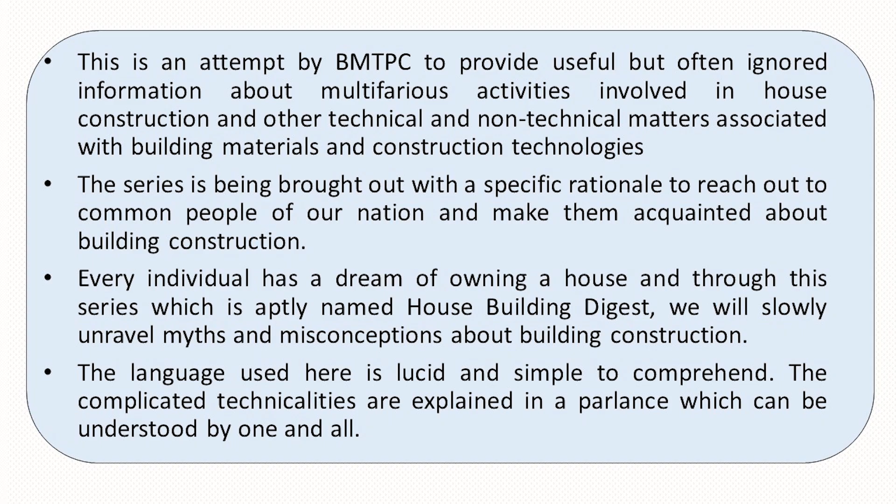Through this digest series, BMTPC is reaching out to the common man to provide useful information about various essential activities involved in house construction, including technical and non-technical matters associated with building materials and construction technologies. Every individual has a dream of owning a house, and through this series, we will slowly unravel myths and misconceptions about building construction. The language used here is simple so that it is understood by one and all.

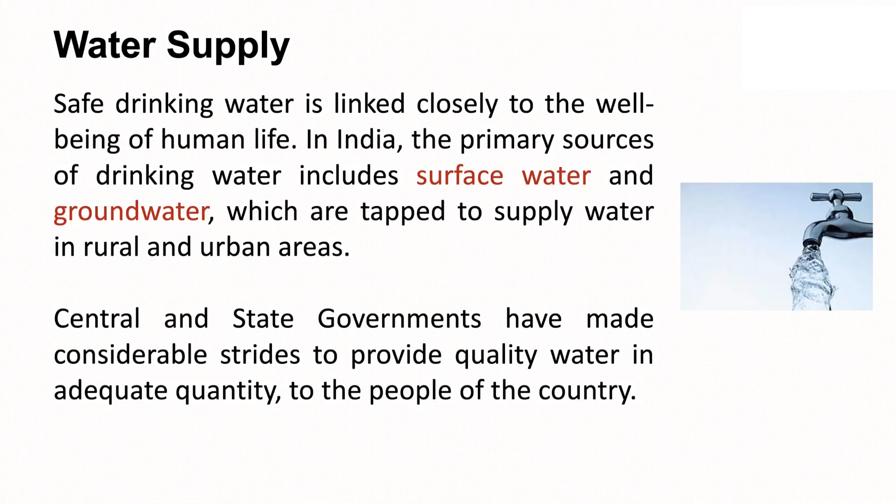Safe drinking water is linked closely to the well-being of human life. In India, primary sources of drinking water include surface water and groundwater, which are tapped to supply water in rural areas and urban areas. Mainly, central and state governments provide quality water in adequate quantity to the people of the country. The quality of water being supplied for domestic purposes is also a cause of great concern.

Water gets contaminated sometimes by different physical impurities, agriculture and industrial waste, and underground chemicals and minerals. This sometimes leads to waterborne diseases, especially among the lower income groups of the society. Regular testing of water quality and using an appropriate water purification system is therefore essential for supplying quality water.

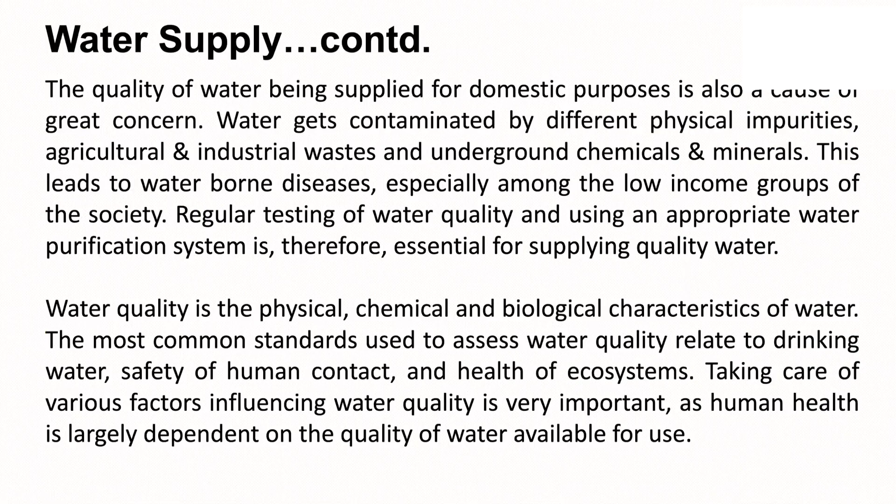Water quality is the physical, chemical, and biological characteristics of water. The most common standards used to assess water quality relate to drinking water, safety of human contact, and health of ecosystems. Taking care of various factors influencing water quality is very important, as human health is largely dependent on the quality of water available for use.

Let's discuss first water supply in urban areas. In urban areas, the municipal corporation or municipalities and urban local bodies are responsible for providing public water supply system. It includes collection of water from source of supply, giving necessary treatment to water for making it hygienically safe and potable, and finally distributing water through a network of piping works, which includes trunk mains, street mains, etc.

Water from a street main is supplied to the individual buildings through service connections. Within the building, the water is distributed to different fixtures through pipes which run through the surface or are concealed in walls or below the flooring.

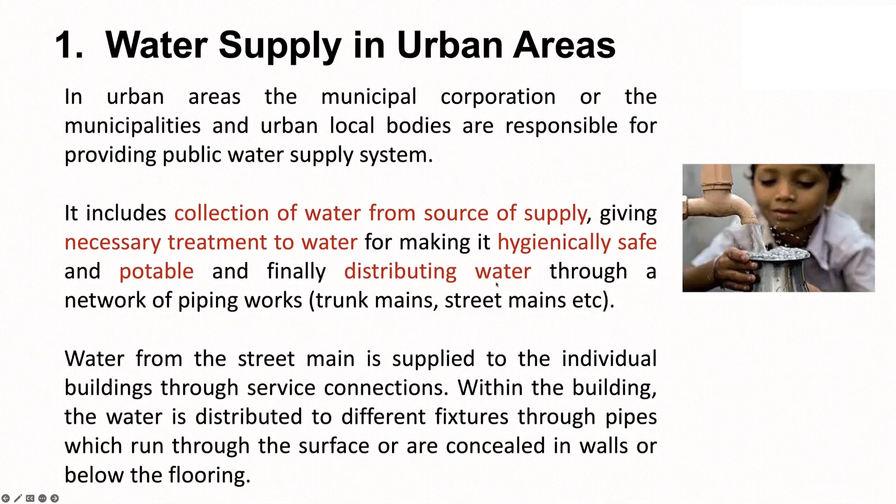Water for domestic purposes is required for drinking, bathing, washing of clothes, cleaning of house and utensils, flushing of toilets, etc. However, the water requirement varies from place to place depending upon the geoclimatic conditions, living habits, etc. In any case, some standards have to be resorted to so as to have adequate quantity of water for the household to carry out their daily domestic chores.

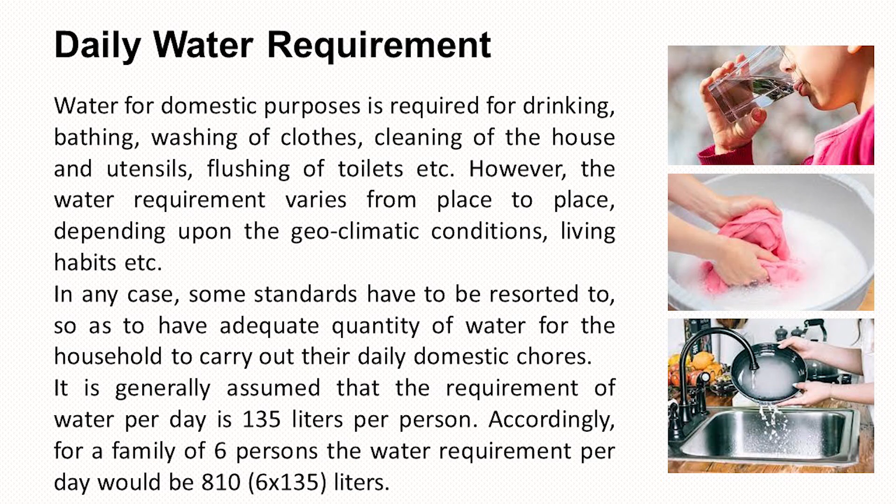It is generally assumed that the requirement of water is 135 liters per day per capita. Accordingly, for a family of 6 persons, the water requirement per day would be 135 multiplied by 6, which will be equal to 810 liters.

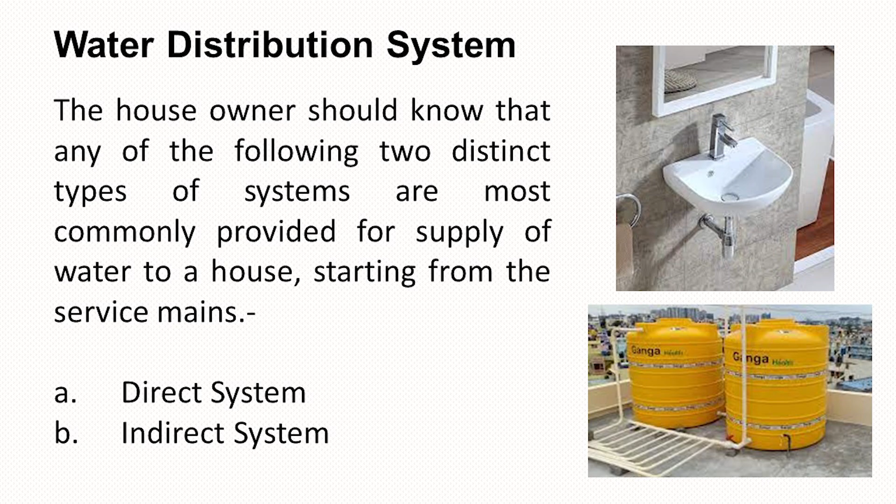There are two distinct types of systems most commonly used for water supply to a house, starting from service mains. One is direct system, another one is indirect system. In direct system, also known as upward distribution system, water is given to various floors in a building directly from the mains with sufficient pressure to feed all the floors and up to the highest point of the building.

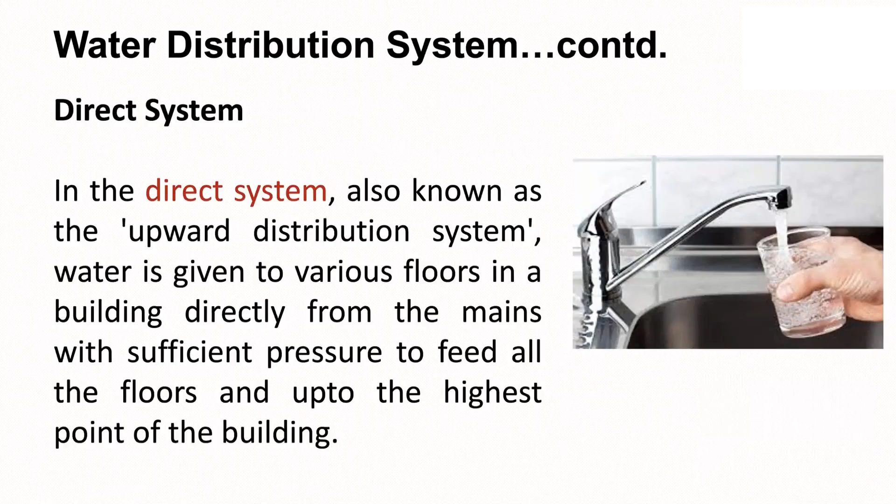Whereas in indirect system, also known as downtake supply or downfall distribution system, the water from mains has to be drawn either by feeding water directly into an overhead water storage tank provided at the roof of the building, from where the water is supplied to different floors by gravity, or feeding the water into an underground water storage tank, from where water is then pumped to the overhead storage tank, from where the water is supplied by gravity.

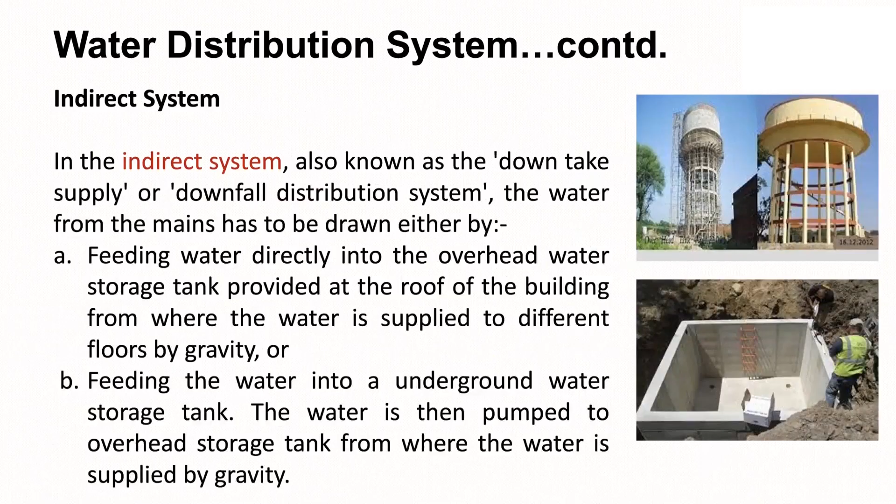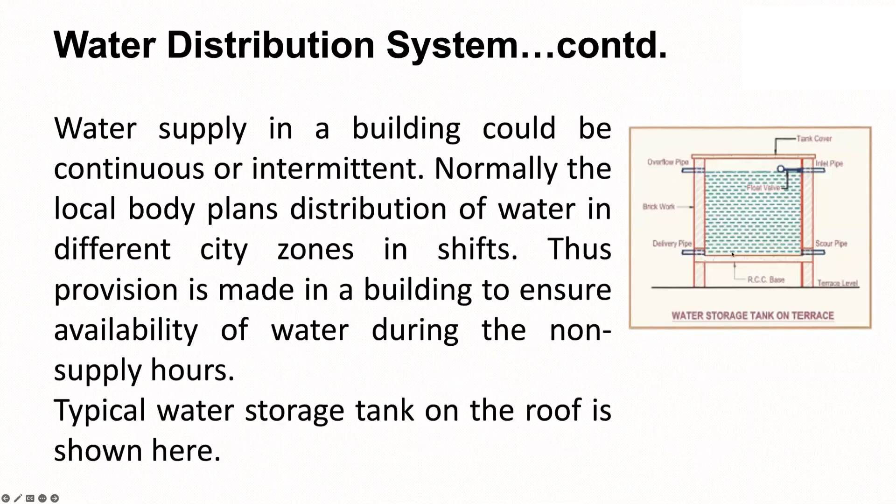Water supply in a building could be continuous or it could be intermittent. Normally, the local body plans distribution of water in different city zones in shifts. Thus, provision is made in a building to ensure availability of water during non-supply hours. A typical water storage tank on the roof is shown on the right hand side.

A proper plumbing system is provided to supply water in the house as also to drain out the wastewater. It is a good idea to understand how the plumbing works in the house.

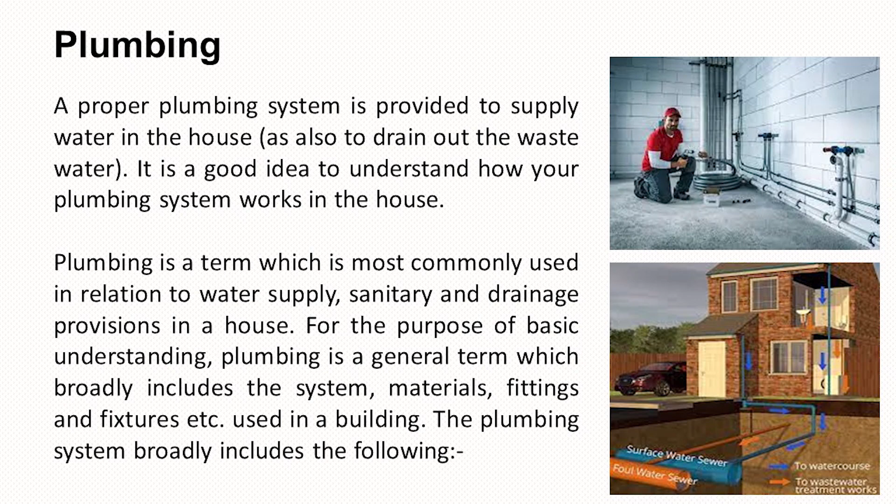Plumbing is a term which is most commonly used in relation to water supply, sanitary and drainage provisions in a house. For the purpose of basic understanding, plumbing is a general term which broadly includes systems, materials, fittings and fixtures used in the building. The plumbing system broadly includes the following: the entire system of water supply and distribution pipes,

including fittings and fixtures like taps, valves, tanks used in connection with water supply; the entire system of sanitary drainage, including fittings and fixtures like wash basins, sinks, water closets, urinals, traps, soil pipes, waste pipes, vent pipes, septic tanks, sewers, etc.; and the entire system of stormwater drainage, including its collection and carrying of rainwater from roofs, paved areas and ground surface into a public stormwater drain or to a pond or river, etc.

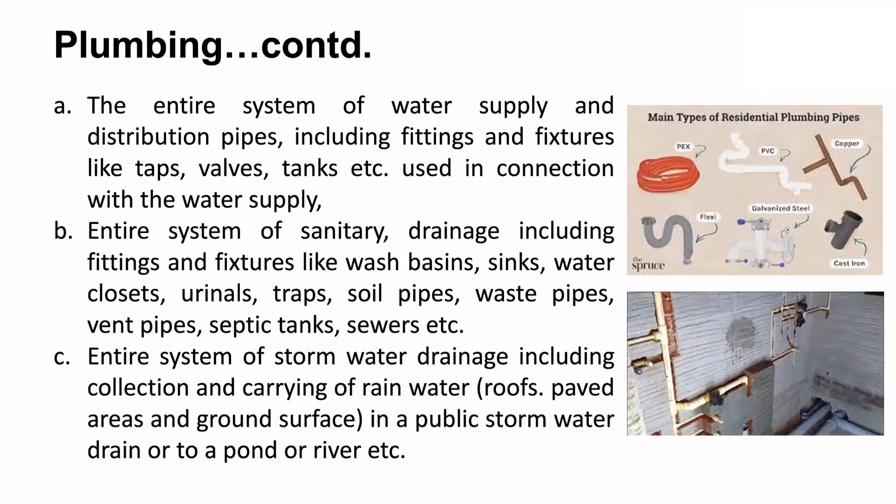In this digest, plumbing related to water supply only has been dealt with. Sewerage will be dealt with in the next digest. It is always advisable for the prospective house owner to get acquainted with the method of supplying water into the house from the service mains of the municipal corporation or municipality which run along the street. It would help in understanding the provisions of water supply during the construction process as also the measures required during subsequent maintenance.

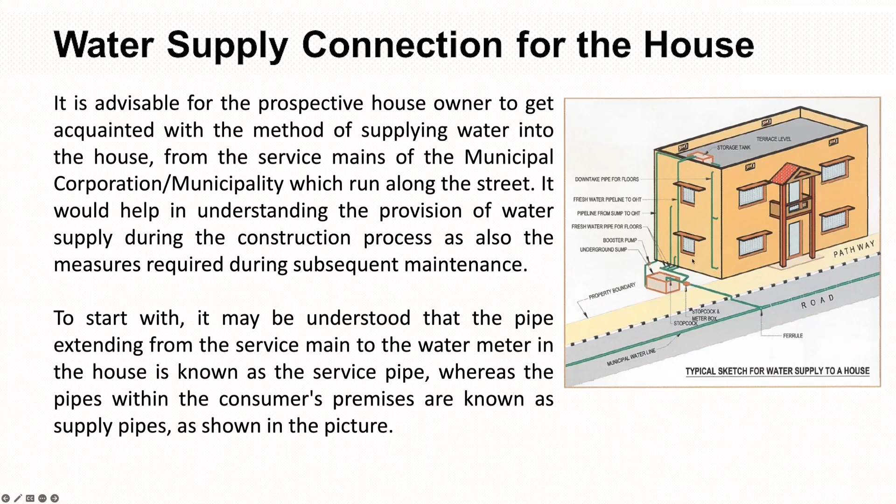To start with, it should be understood that the pipe extending from the service main to the water meter in the house is known as the service pipe, as shown in this picture, whereas the pipes within the consumer premises are known as supply pipes. For providing water in the house, a hole is drilled in the service pipe and a brass ferrule is screwed in a watertight box. The size of the ferrule is dependent upon the size of the service pipe.

A 40 to 50 centimeter long flexible curved pipe, also termed a gooseneck, is usually inserted between the ferrule and service pipe. A stopcock is normally inserted in the service pipe between the ferrule and the service pipe leading to the water meter. The connection from the service pipe to the water meter is known as the service connection. The service connection is provided by the local authority, whereas the homeowner has to provide the water supply pipes, fittings,

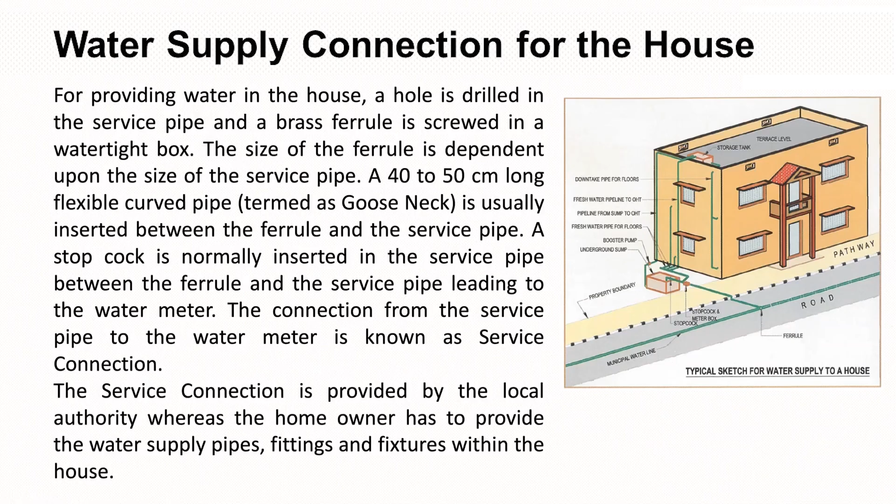fixtures within the house. When water enters the house via the service connection, typically the water supply is split, with one line going to the sump or overhead tank in the house and the other directly to the floors. For the house, the main supply lines are typically 1 inch to 3/4 inch in diameter. The lines that branch off to individual fixtures are usually 1/2 inch in diameter. These diameters are only illustrative and can vary with the actual design of a plumbing system. The work for the system should ideally be done by a licensed trained plumber.

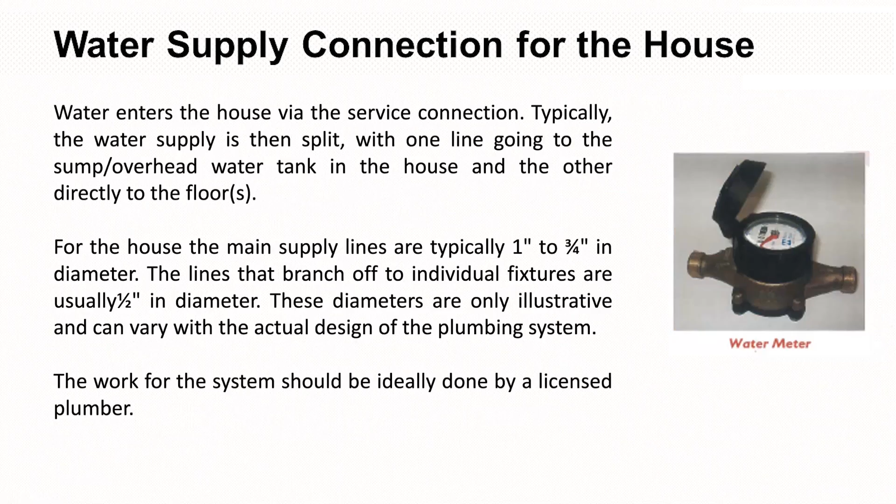Now let's understand different types of pipes. Lead plumbing was an established practice in earlier times. However, it is replaced by galvanized iron water pipes which are attached with threaded pipe fittings. For the purpose of high durability, brass pipes and fittings are also being used, although they involve higher costs. PVC or UPVC plastic supply pipes have become increasingly common since 1970, with a variety of materials and fittings employed. However, plastic water pipes do not keep water as clean as copper and brass pipes do unless the joints are properly provided and sealed.

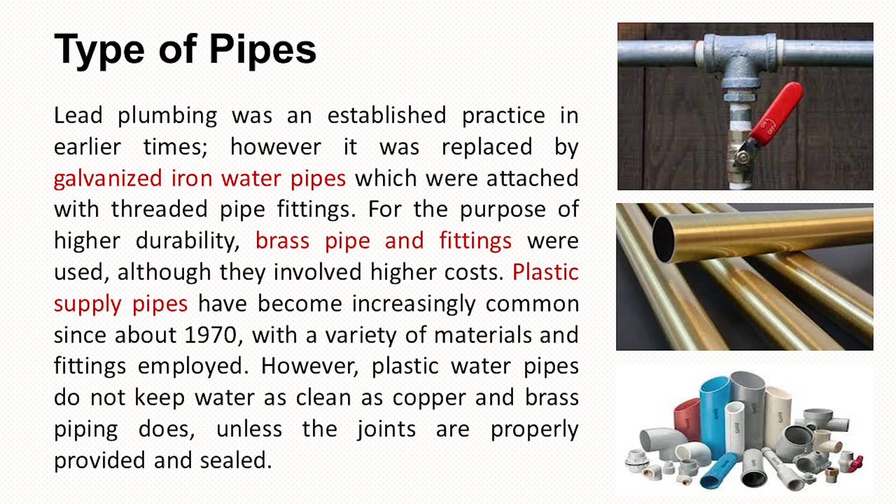Presently, there are a number of types of pipes which can be used for providing water within your house. The commonly used water pipes are cast iron pipes, steel pipes, galvanized iron or GI pipes, copper pipes, and PVC pipes. Cast iron pipes are extensively used in water distribution mains as they are comparatively cheaper in cost, highly resistant to corrosion, and have a long life. Steel pipes are used in water mains in situations where water is subjected to very high pressure and the diameter required is large. These pipes are stronger and lighter in weight as compared with CI pipes.

Galvanized pipes are wrought iron pipes provided with zinc coating. They are most commonly used for water supply works inside the building. Copper pipes are generally used for hot water supply installations in the house. PVC pipes are being used increasingly nowadays for supply of cold water for external and internal plumbing works.

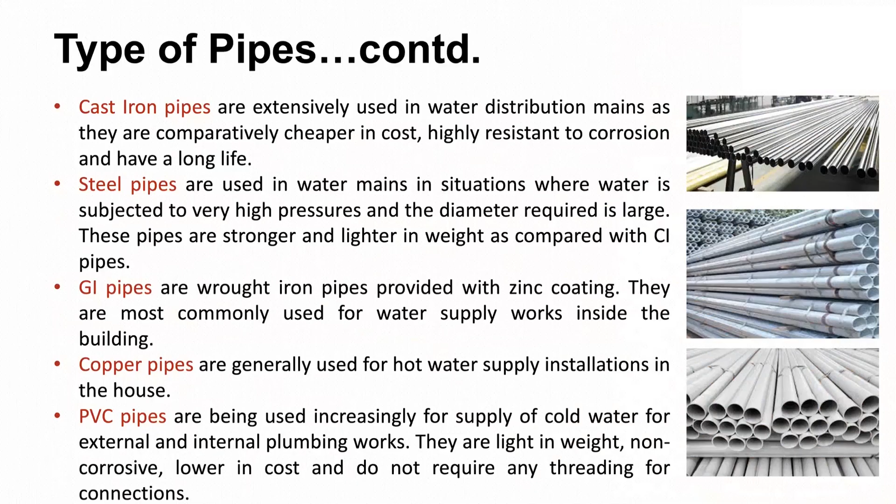They are light in weight, non-corrosive, lower in cost, and do not require any threading for connections. Fittings and fixtures and appliances are essential features in a domestic water supply system. The house owner should have a basic knowledge of these to understand these utilities as also their performance.

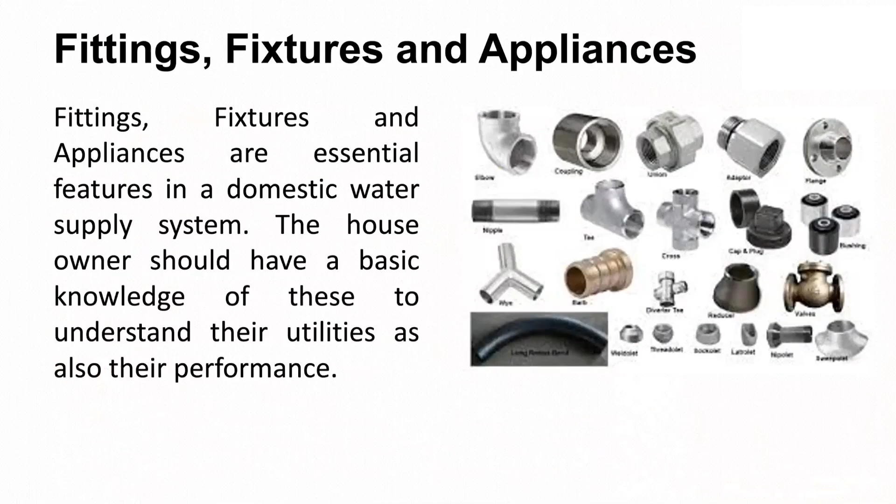Let's see fittings. Fittings are very important components of water supply system. They are used at different places in a supply system to provide the desired flow of water as well as facilitating maintenance. Fittings are used in plumbing system to connect the pipes, to adapt to different sizes or shapes of pipes in the system, as also to facilitate and regulate the flow of water therein.

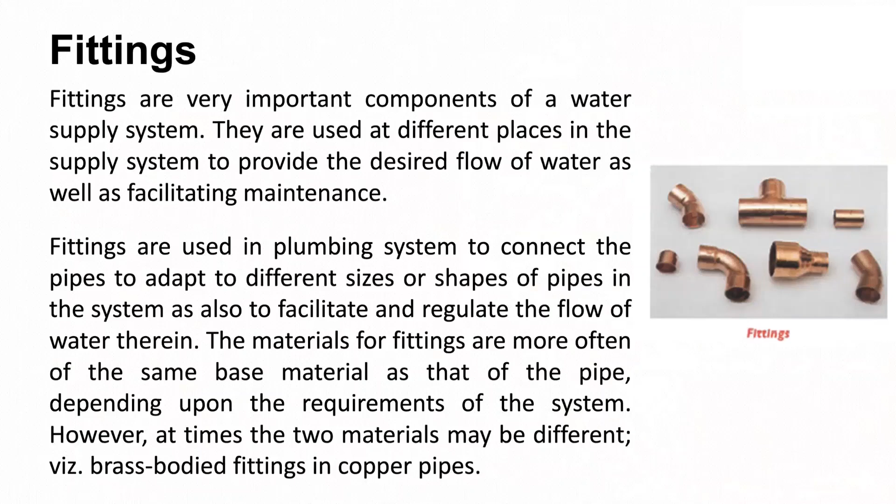The materials for fittings are often same or are more often of the same base material as that of pipe, depending upon the requirements of the system. However, at times two different materials may be used, like brass bodied fittings in copper pipes. The most common fittings used in the system will be explained now for the information of prospective house owners.

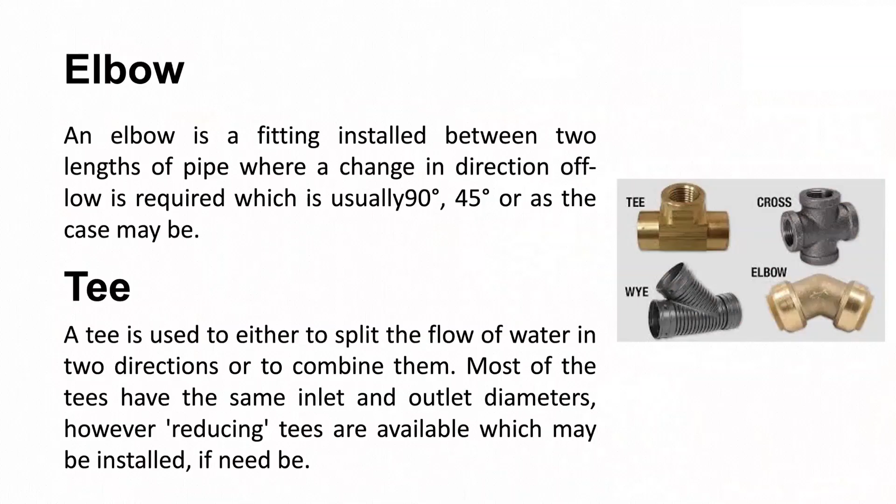First is elbow. An elbow is a fitting installed between two lengths of pipe where a change in direction of flow is required, which is usually 90 degrees or 45 degrees, or as the case may be. Another thing is T. A T is used to either split the flow of water in two directions or to combine them. Most of the T's have the same inlet and outlet diameters. However, reducing T's are also available, which may be installed if need be. A cap or plug is a type of fitting which is used to cover the end of pipe.

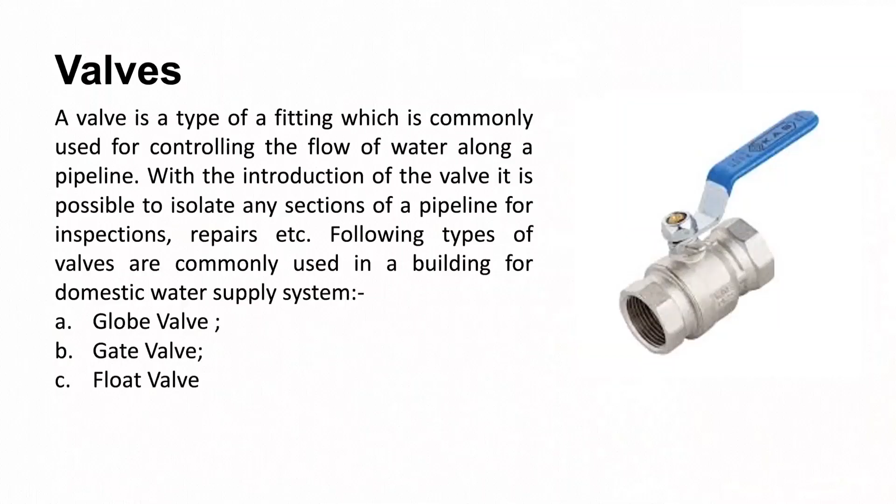Valves. A valve is a type of fitting which is commonly used for controlling the flow of water along a pipeline. With the introduction of the valve, it is possible to isolate any section of a pipeline for inspections, repairs, etc. Following types of valves are commonly used in building for domestic water supply: globe valve, gate valve, and float valve. Let's discuss them one by one.

A globe valve is the most commonly used valve for manually controlling or closing the flow of water in domestic water supply. They are also used for controlling flow of water to wash basins, shower, kitchen sinks, etc. Gate valve is used to control water flow or for completely stopping the flow of water in a pipeline. Gate valve is commonly used to control flow of water from your storage tank.

A float valve is used to supply water to a storage tank or flushing system and to automatically shut off the supply when the predetermined level of water has been reached. Taps are provided at the end of the pipeline to draw off the water. A tap is also known as bibcock. A variant of a bibcock is the stopcock, which is used for controlling or stopping the flow of water in a particular section of a pipeline.

A fixture is a device in a water supply system for delivering and draining away water to enable a particular use. The most common water supply fixtures include kitchen sinks, utility sinks, bathtubs, and showers. Appliances are gadgets which run on water and help in carrying out daily chores. These are geysers, washing machines, etc.

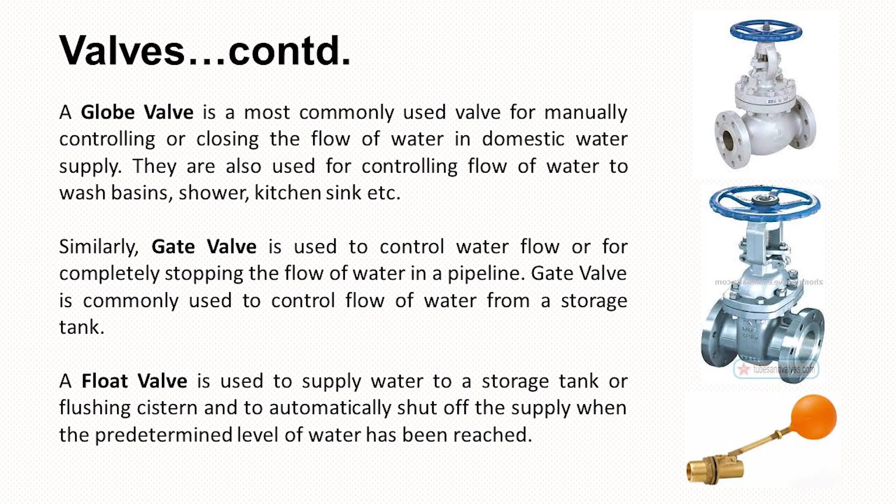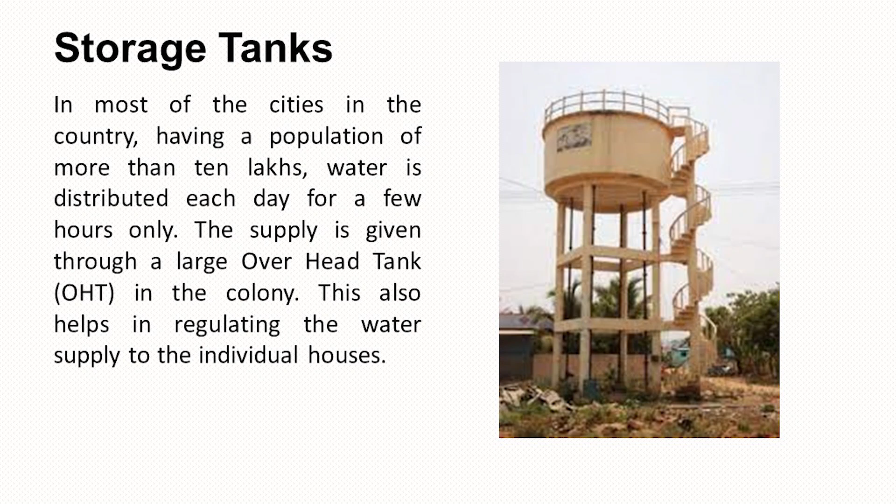When piped water supply is not available for individual houses, community taps are provided in the colony, and people store water in large utensils. On the other hand, where piped water supply is available for individual house, people adopt alternate means of storage. In such cases, it has become a common practice to have storage tanks in the houses in the form of a sump at the ground level or an overhead tank on the terrace, or a combination of both. The storage tank in the house can be made from brick masonry or GI sheet, ferro cement, PVC, or RCC, etc.

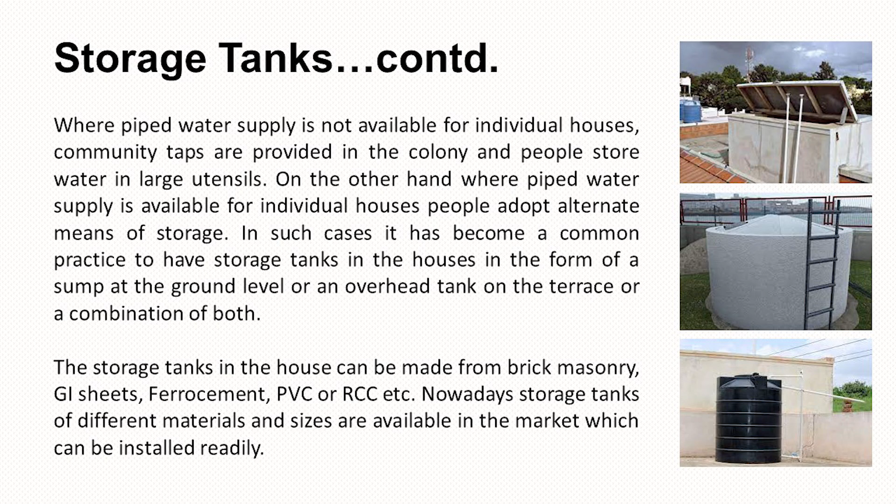Nowadays, storage tanks of different materials and sizes are available in the market, which can be installed readily. The capacity of overhead tank or OHT at the terrace and of sump depends on number of users in the building, frequency and duration of supply of municipal water, etc. The capacity of both storage tanks has to be decided with great care in order to have sufficient water supply in the house on a continuing basis.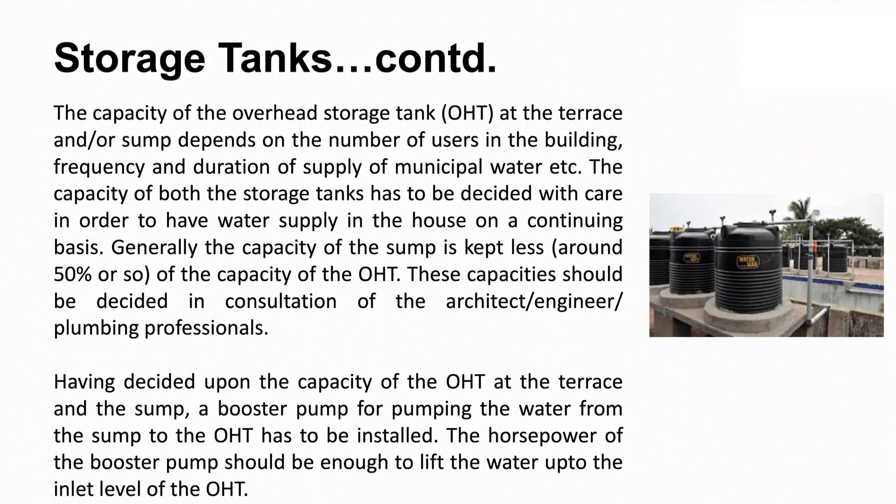Generally, the capacity of sump is kept less, around 50% or so of the capacity of OHT. These capacities should be decided in consultation with architect, engineer, and plumbing professionals. Having decided upon the capacity of OHT at the terrace and the sump, a booster pump for pumping the water from sump to the OHT has to be installed. The horsepower of booster pump should be enough to lift the water up to the inlet level of your OHT.

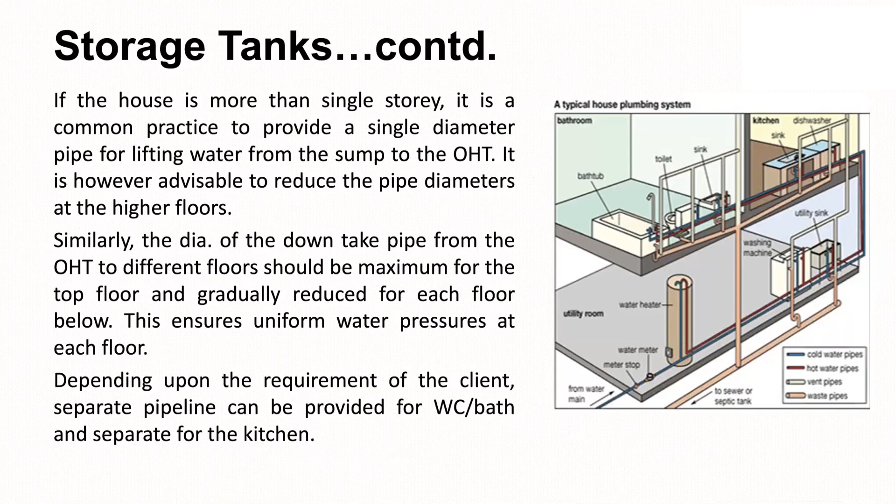If the house is more than a single story, it is common practice to provide a single diameter pipe for lifting water from the sump to the OHT. It is, however, advisable to reduce the pipe diameters at higher floors. Similarly, the dia of the downtake pipe from OHT to different floors should be maximum for the top floor and gradually reduced to each floor below. This ensures uniform water pressures at each floor. Depending upon the requirements of the client, separate pipelines can be provided for WC, bath, and separate for kitchens.

There are different gadgets available nowadays which give an alarm as and when OHT or sump is getting emptied. This is of immense convenience for the house owner, as otherwise the house owner has to continuously check the levels of water in the sump or OHT.

Now let's discuss contamination of water. The quality of water available to the house owner should be potable water, meaning thereby it should be suitable for drinking, pleasant to the taste, and usable for domestic purposes. Basically, it should not be contaminated, as contaminated water leads to ill health of the residents of the house. Drinking contaminated water is harmful to the human body and leads to various diseases like diarrhea, jaundice, typhoid, etc.

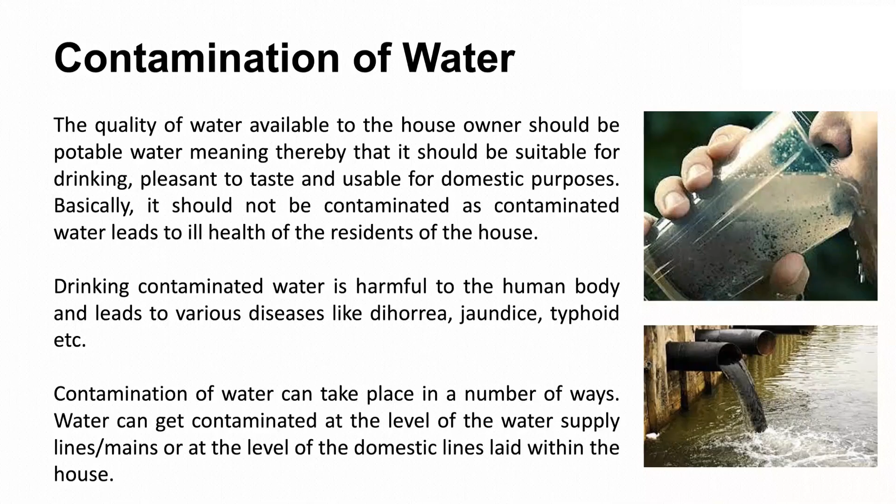Contamination of water can take place in a number of ways. Water can get contaminated at the level of water supply lines, or at the main, or at the level of domestic lines laid within the house. At the domestic level, contamination may be due to intermittent supply, leakage in underground pipes, and improper storage in the house. Faulty joints, valves, and corroded pipes are also sources of contamination. Water supply lines placed in the vicinity of sewage drains, sullage, and manholes increase the chances of water getting contaminated.

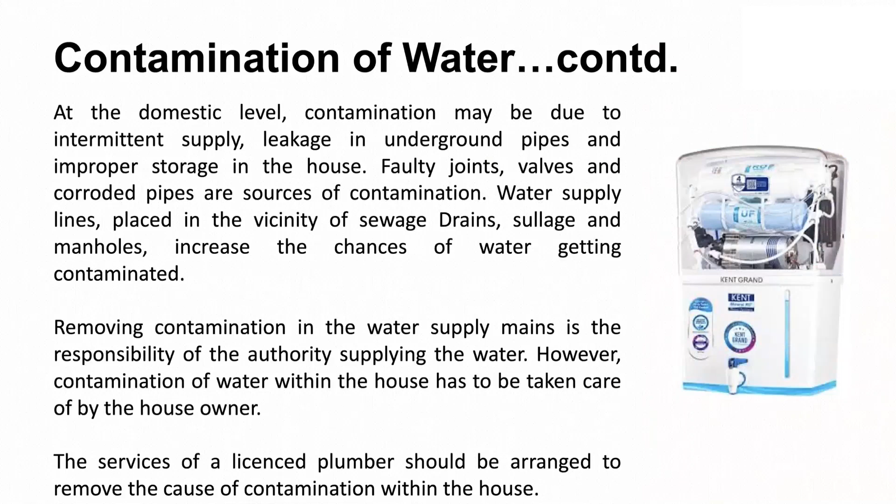Removing contamination in the water supply mains is the responsibility of the local authority supplying the water. However, contamination of water within the house has to be taken care of by the house owners themselves. The services of a licensed or experienced plumber should be arranged to remove the causes of contamination within the house.

Water testing. Water needs testing if it smells foul, the taste gets changed, becomes brackish, gets colored, mud or such other materials come along with the flow, etc. It is advisable to test the water at certain intervals or as and when it is felt that water is getting contaminated. Presently, some kits are also available which help in testing the domestic water supply.

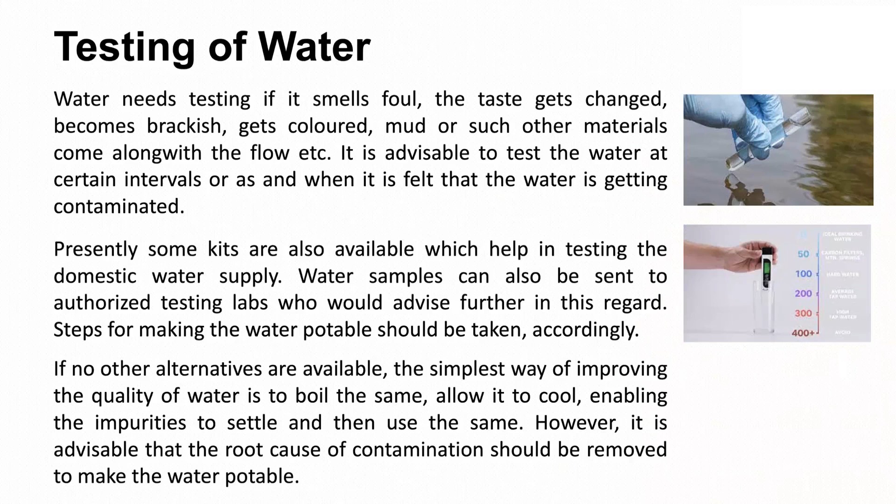Water samples can also be sent to authorized testing labs who would advise further in this regard. Steps for making the water potable should be taken accordingly. If no other alternatives are available, the simplest way of improving the quality of water is to boil the same, allow it to cool, enabling the impurities to settle, and then use the same. However, it is advisable that the root cause of contamination should be removed to make water potable. Clean drinking water is a basic necessity of life, be it in urban area or in a rural area.

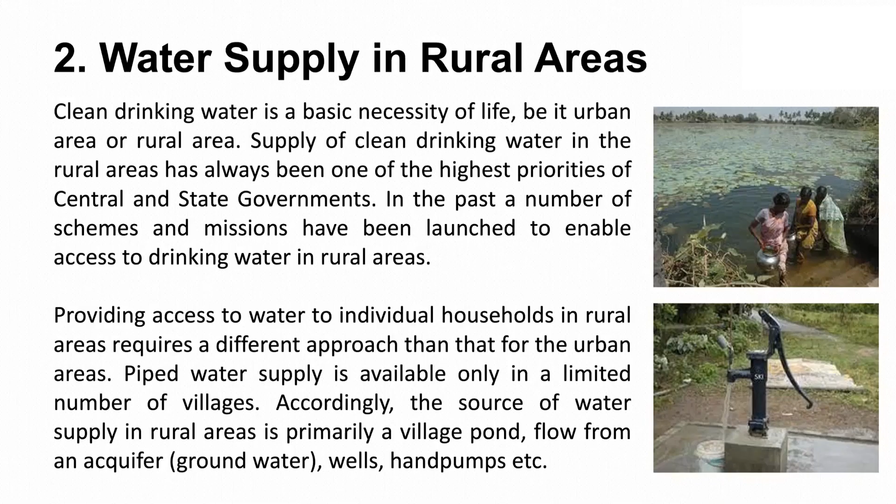Now let's discuss water supply in a rural area. Supply of clean drinking water in the rural area has always been one of the highest priorities of central government and state governments. In the past, a number of schemes and missions have been launched to enable access to drinking water in rural areas. Providing access to water to individual households in rural areas requires a different approach than that of urban areas. Piped water supply is available only in a limited number of villages. Accordingly, the source of water supply in rural area is primarily a village pond, flow from an aquifer, that is groundwater, wells, hand pumps, etc.

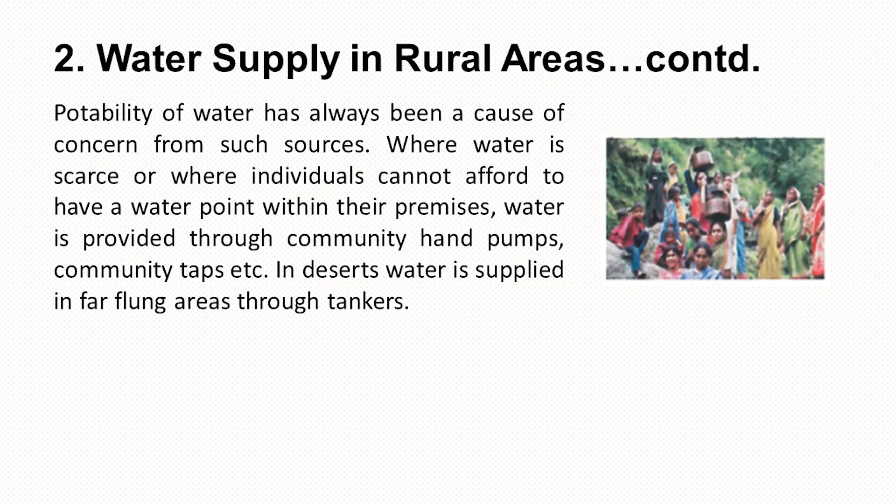Potability of water has always been a cause of concern from such sources. Where water is scarce or where individuals cannot afford to have a water point within their premises, water is provided through community hand pumps, community taps, etc. In desert, water is supplied in far-flung areas through tankers.

Groundwater is the water located beneath the ground surface or an aquifer, which can yield a usable quantity of water. In plain areas, this water is available below the natural ground level. This water can be tapped in a variety of ways, namely digging a well, installing a hand pump, etc. In hilly areas, water starts seeping out at different locations and can be a source of supply for the village or the individual. The supply can be regulated by installation of pipe, etc.

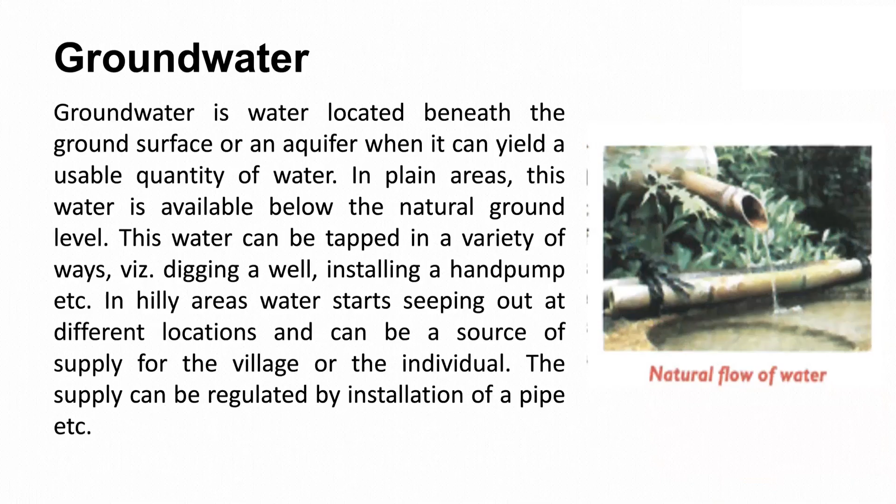Now let's discuss wells. A water well is an excavation or structure created in the ground by digging, driving, boring, or drilling to access groundwater in underground aquifers. The water can be drawn by an electric pump, hand pump, or buckets. At times, the ground may contain impurities, including minerals, and accordingly, it has to be treated before use.

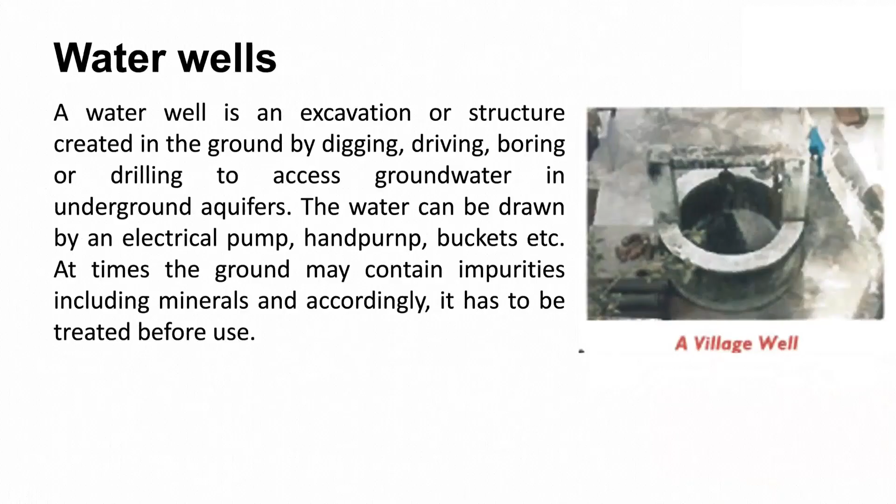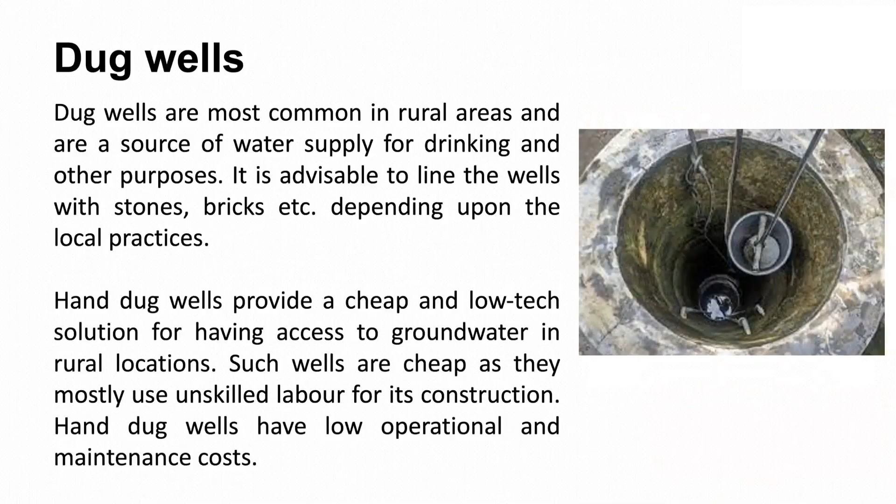Dug wells are most common in rural areas and are a source of water supply for drinking and other purposes. It is advisable to line the wells with stones, bricks, etc., depending upon local practices. Hand dug wells provide a cheap and low-tech solution for having access to groundwater in rural locations. Such wells are cheap as they mostly use unskilled labor for their construction. Hand dug wells have low operational and maintenance costs.

Driven wells are made by driving a hole into the ground at a point where water is available below the ground level and then driving a pipe, preferably having screens. Water is drawn out of the pipe with the help of a pump.

Drilled wells can be made by simple hand drilling methods or machine drilling. Drilled wells can get water from much deeper levels than dug wells. Such wells have electric pumps for lifting water and are currently used at many places, typically in rural or sparsely populated areas. They can be shallow or deep in nature, depending upon the depth at which water is available below the ground level.

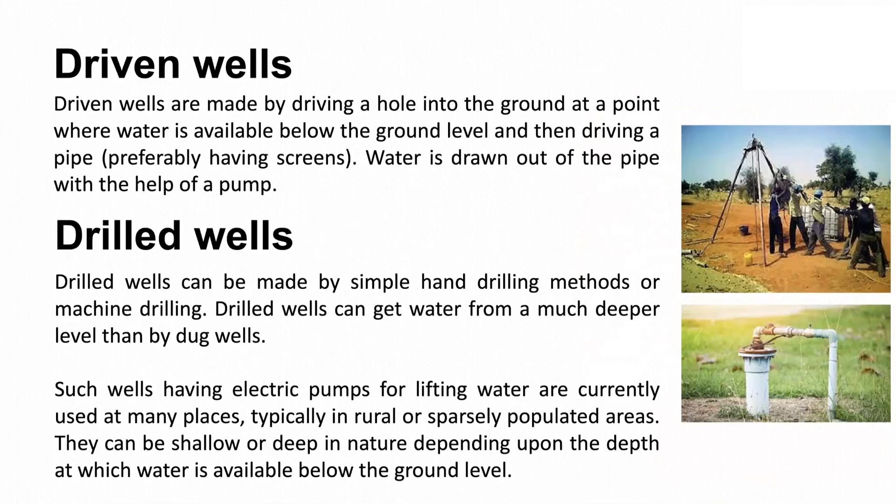Hand pumps, as you can see here, are widely used both in rural as well as urban areas for lifting the water for drinking and other purposes. Many different types of hand pumps are available in the market, and house owners can select the same as per their requirements. The height to which a hand pump could lift water is governed by the ability of the pump and the operator to lift the weight of water in the delivery pipe.

Typically, suction pumps can lift water up to 7 meters, low lift pumps and direct action pumps up to 15 meters, intermediate lift pumps up to 25 meters. High lift pumps can lift water more than 45 meters below the ground level.

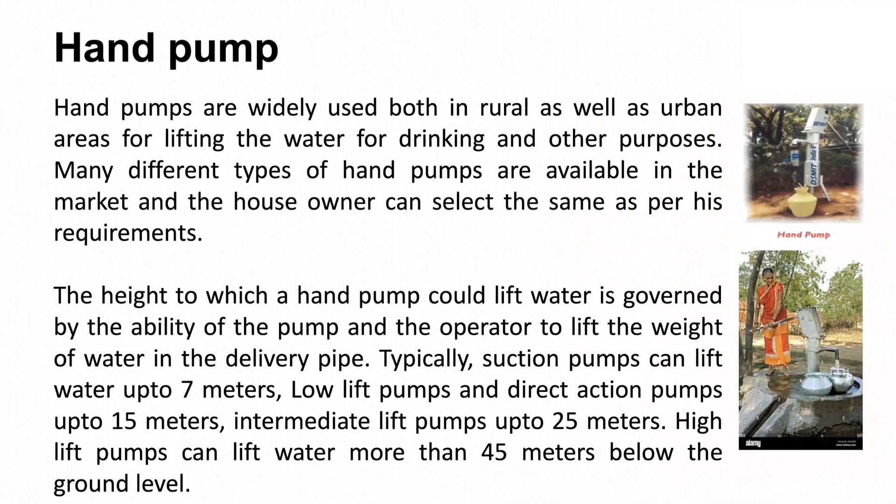At last, let me tell you that water has become a scarce commodity and is no longer a free gift of nature. Accordingly, it is essential that the plumbing system for water supply should be installed properly with great care such that water is available to the house owner in the right quantity and time for carrying out domestic chores. The system should be such that leakages therein are rare. Any leakage would not only waste water but would also lead to contamination.

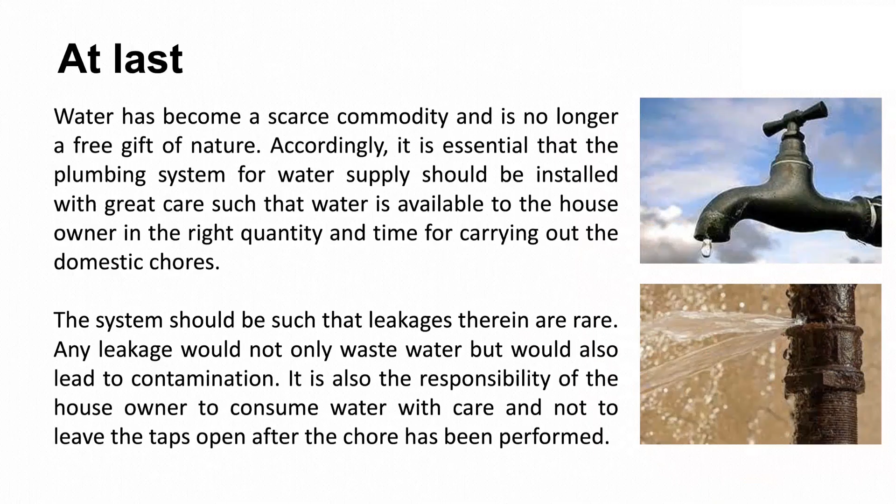It is also the responsibility of the house owner to consume water with care and not to leave the taps open after the chores have been performed. This is all about House Building Digest number 10, and I sincerely hope that it will be helpful for creating awareness about the water supply to the house.